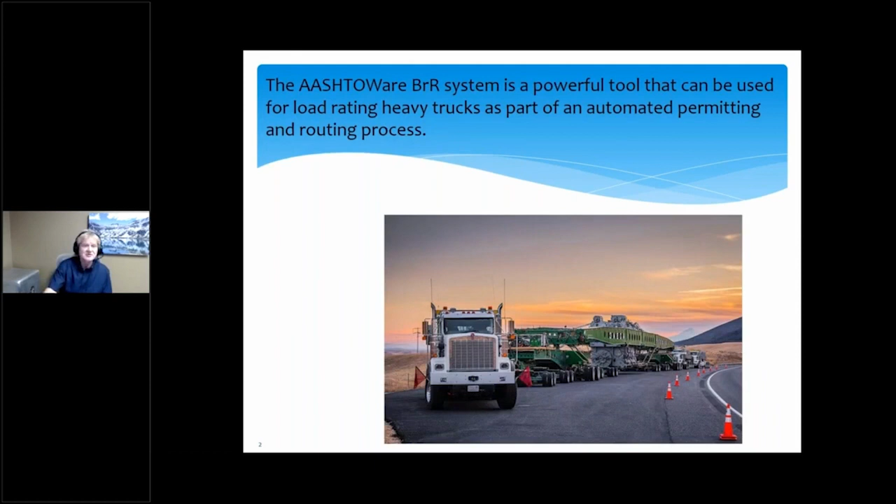The AASHTOWare BrR system is a powerful tool that can be used for load rating heavy trucks as part of an automated permitting and routing process.

The oversized overweight trucking industry expects state permit offices to be able to self-issue permits that weigh as much as 250,000 pounds. The higher the weight the state allows to be self-issued, the more friendly the color that the SC&RA has put on it, green being the best and red being the least favorite.

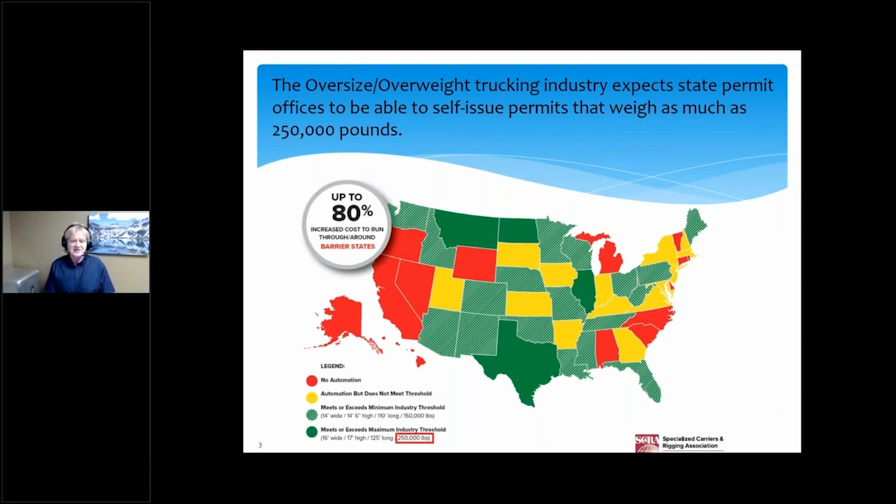I'm happy to say that 3 out of the 4 green states on this map use ProMiles routing systems.

Using the AASHTOWare BrR product, DOTs have provided safe, automated, oversized, overweight routing and permitting for these heavy loads up to 250,000 pounds. BrR is able to load rate vehicles that self-issue up to as high as 250,000 pounds, and is able to load rate 90% or more of the typical DOT's bridge inventory.

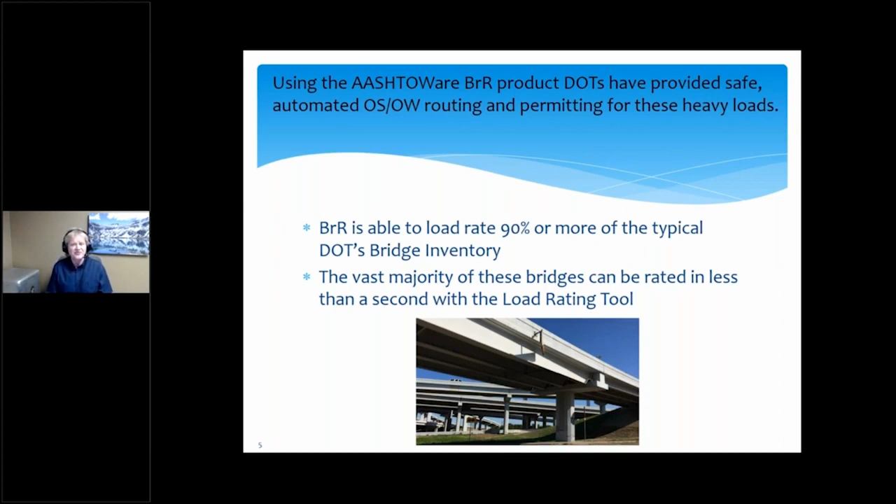The vast majority of these bridges can be rated in less than a second with the load rating tool. Keep in mind, this is full load rating, not any sort of approximation.

This presentation describes how to use the AASHTOWare BrR system with an automated oversized overweight permitting and routing system.

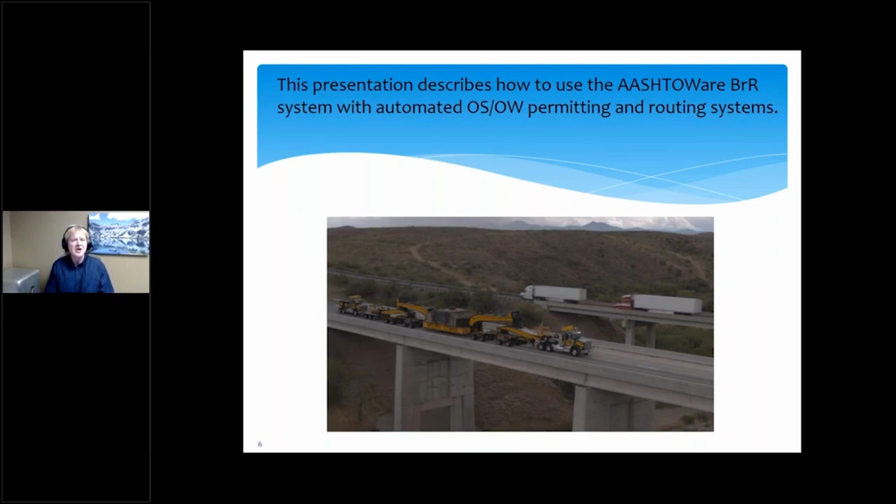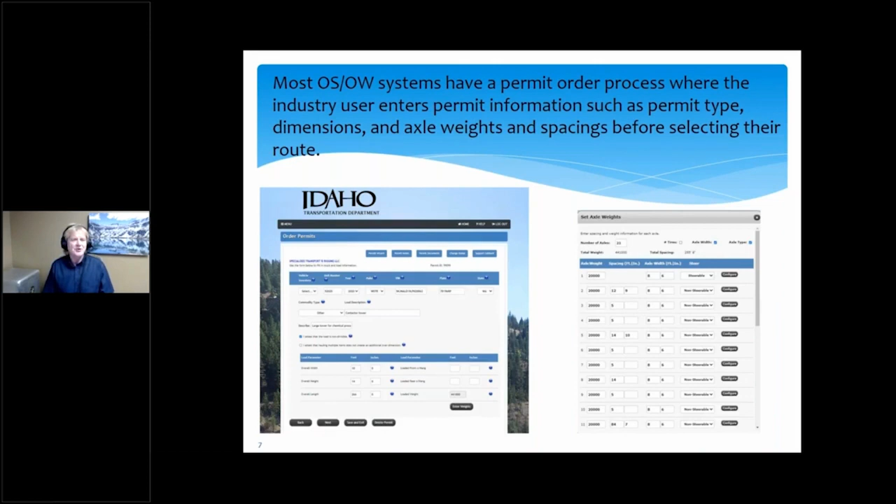Most of the oversized overweight permitting systems have a permit order process where the industry user enters permit information such as permit type, dimensions, axle weights, and spacings before selecting the route.

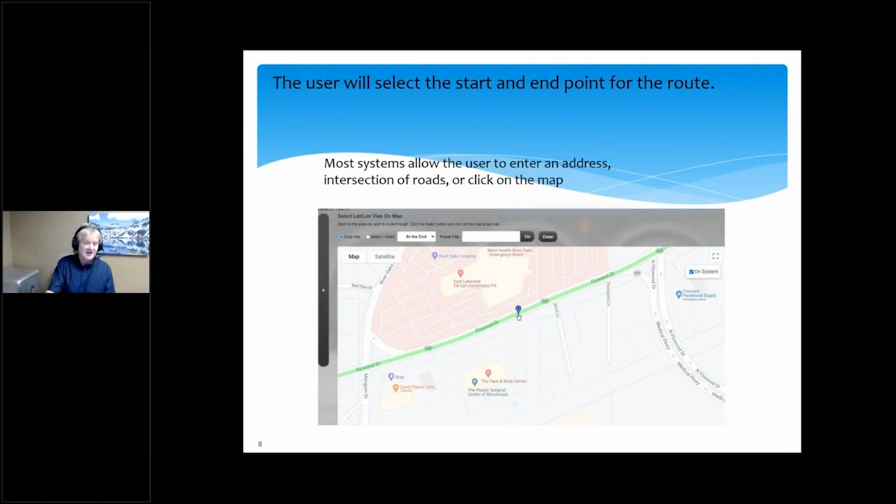The user will select the start and the end point for the route. Most systems allow the user to enter an address, intersection roads, or click on the map to identify the start and the end of the route.

The automated permitting and routing system will then calculate a route that is safe for the permit. The route calculation is performed while the user is waiting, so generally this needs to be done in a minute or less. It's this time constraint that drives how the load rating is performed in these systems.

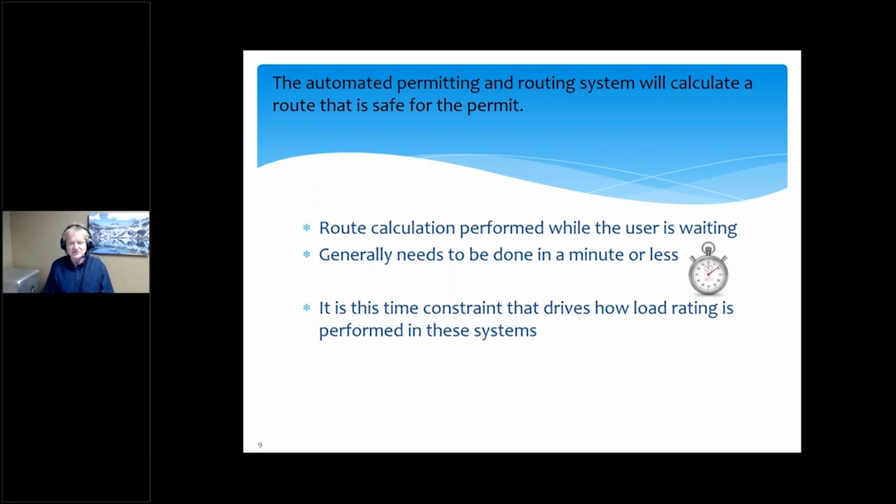Keep this time constraint of about a minute or so in mind, that's what you've got to present the user a route, or they'll consider your system unresponsive. Keep that in mind for the rest of the presentation.

The first step is to provide an overview on how oversized overweight routing happens. The first step of this is to build a routable GIS data set for all roads under the permit office authority.

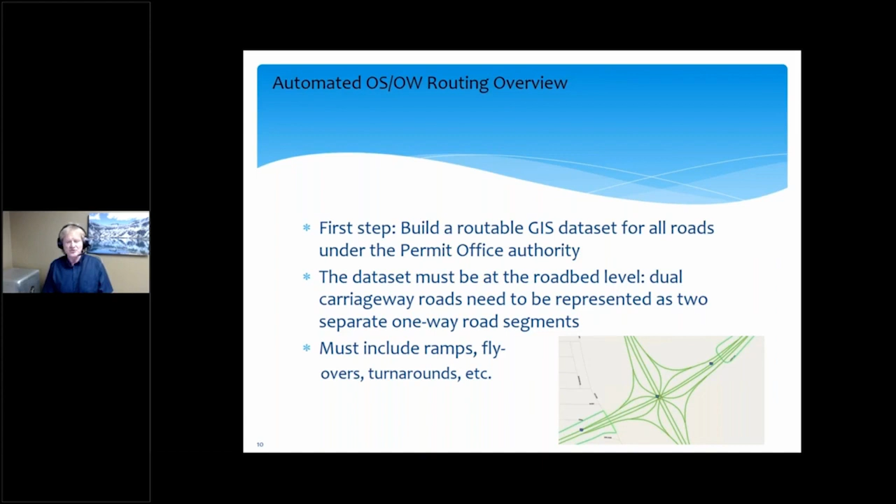This data set must, of course, be routable. That includes one-way directions, turn restrictions, signage, and so forth. The data set must be at the roadbed level, meaning dual carriageway roads need to be represented as 2 separate one-way road segments going in opposite directions. Your GIS data set must also include all ramps, flyovers, turnarounds, and so forth that connect the main roads together.

After you've built this GIS data set, it describes where permit vehicles can be permitted. We've got a screenshot here of the Denver area in Colorado, and you can see the green highlights on some of the various roads, and also on some roads that are not displayed at this zoom level. It's those green roads where the permit vehicle can travel and be permitted.

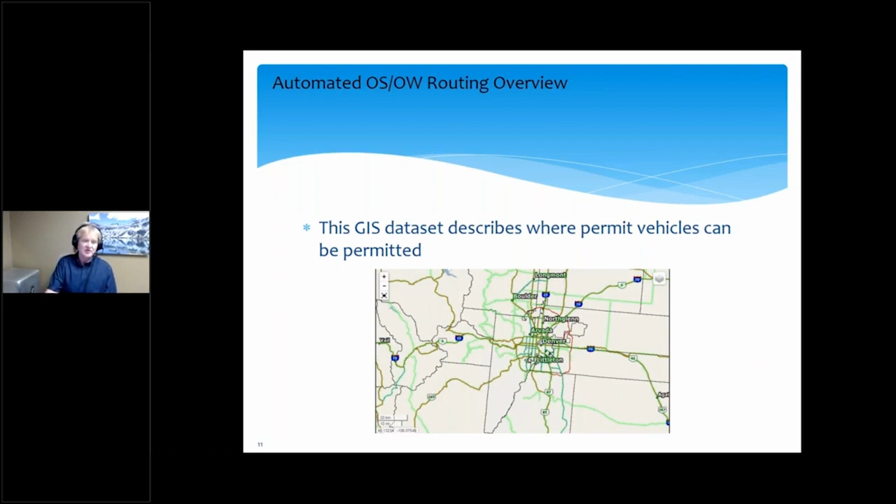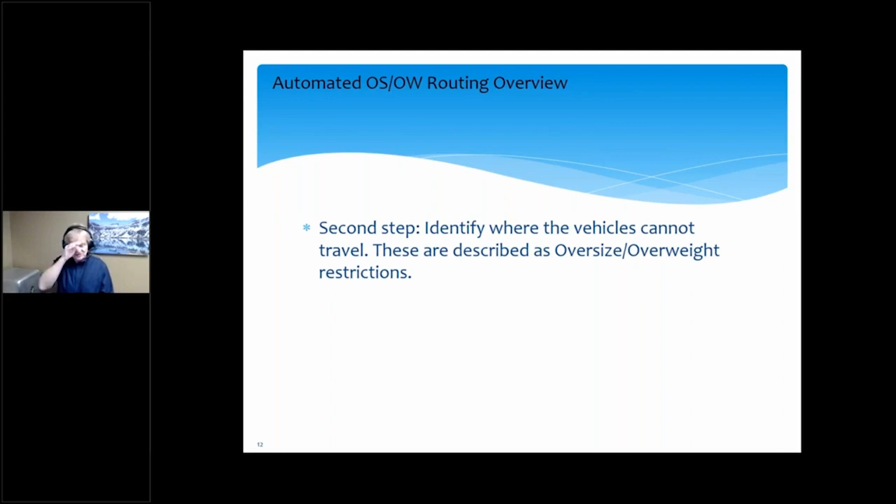The second step is to identify where a particular vehicle cannot travel. These are described as oversized overweight restrictions. It's these restrictions that will be applied to the roads that the permit office has jurisdiction on, and they're also specific to a particular permit, vehicle, and route.

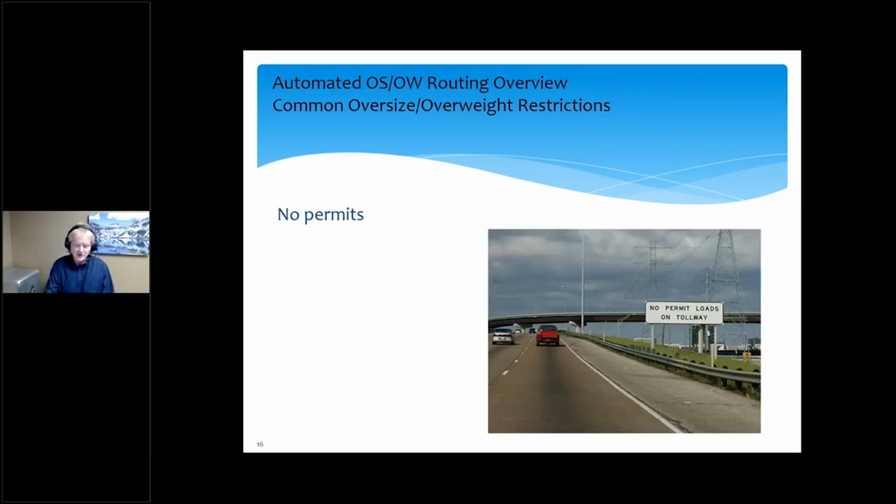The most common restrictions are vertical clearance, construction, no permits, turn restrictions, posted weight bridges and other posted weight restrictions, and finally bridges that fail load rating.

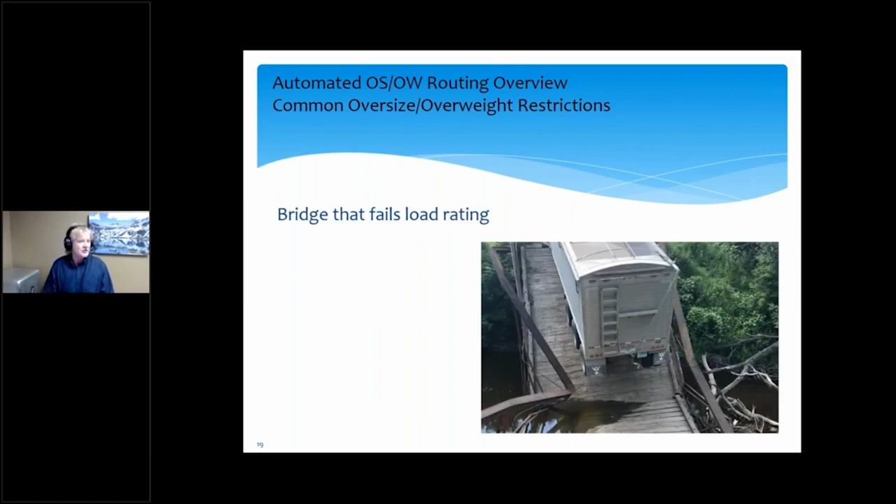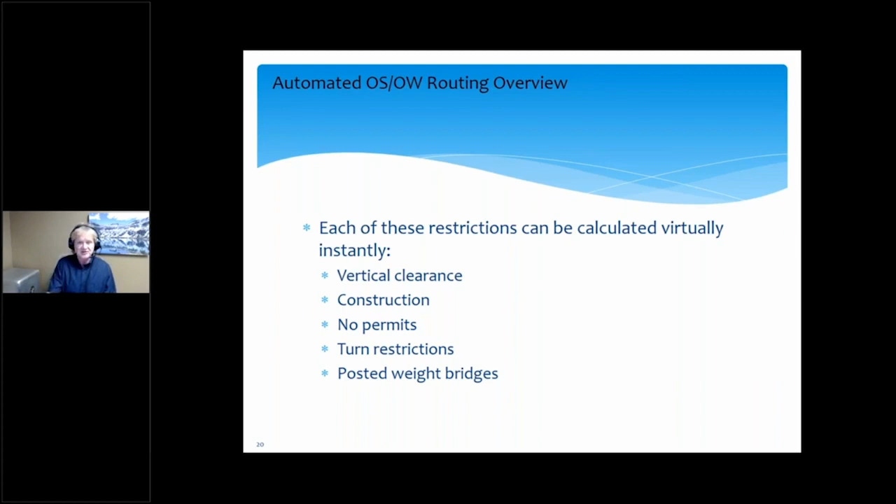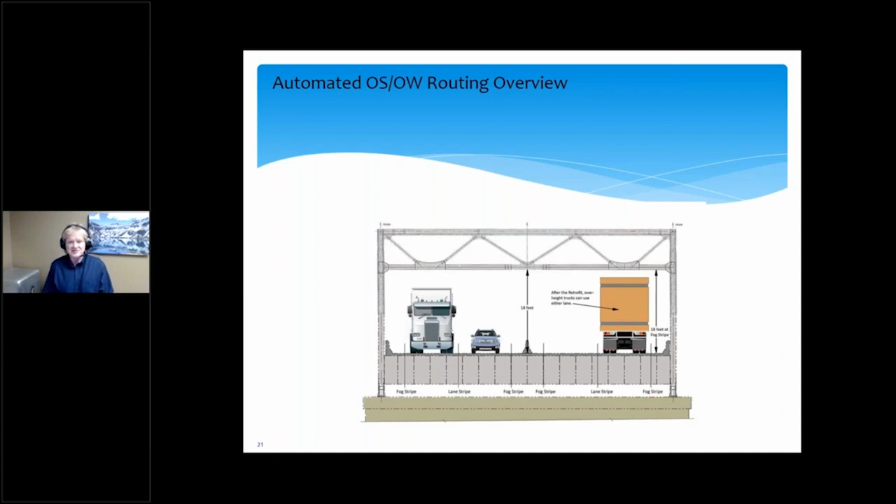Each of the restrictions on this list, basically all of them except load rating, can be calculated virtually instantly. That includes vertical clearance, construction, no permit, turn restrictions, and posted weight bridges. For example, to identify whether a truck fits underneath a bridge is fairly simple. You just compare the height of the truck versus the underclearance of the bridge. If the truck fits, you're good to go. If it doesn't, then that truck has to go around that bridge.

The routing system is generally able to identify all of the restrictions, except of course the live load rating applicable to a particular permit in the state, in less than a second. The way the permitting or routing systems work is it identifies all restrictions applicable for a particular permit in the state, and then it's able to route from the origin to the destination avoiding all of these restrictions. The optimal route can be calculated around any restriction applicable to that load in less than a second, usually in just a few hundred milliseconds.

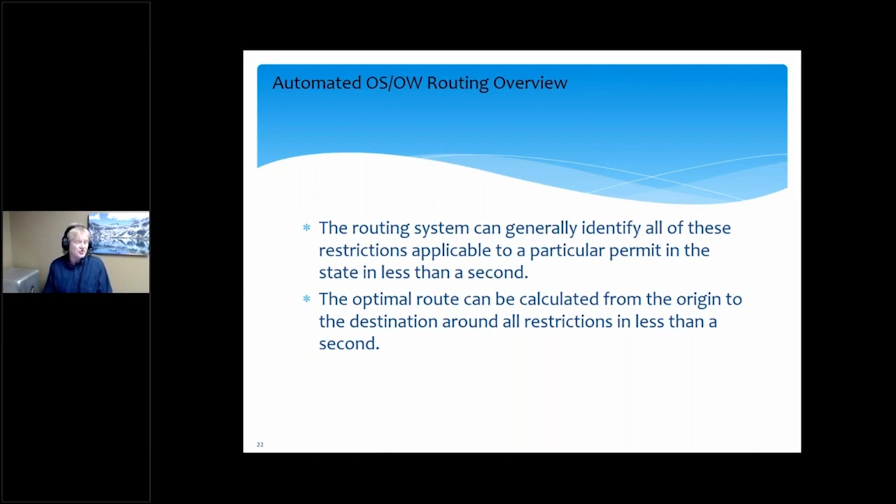Now the last restriction, load rating, is a little bit different. High quality load rating requires more computational analysis. It takes more time. The fastest high quality load rating currently is 40 to 50 bridges per second, and that's using relatively simple models with a single multi-core server.

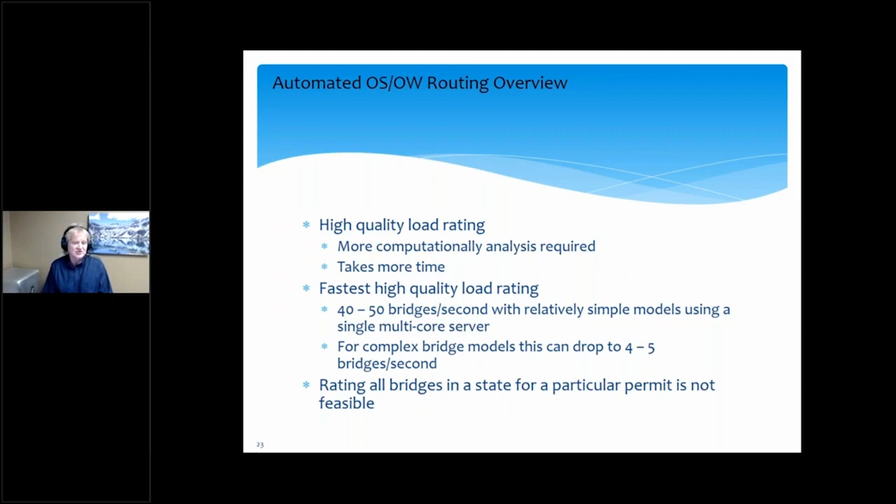With more complex bridge models, this can drop to as little as 4 to 5 bridges per second, again on that single multi-core server. Because of this, rating all the bridges in virtually all states for a particular permit is not feasible.

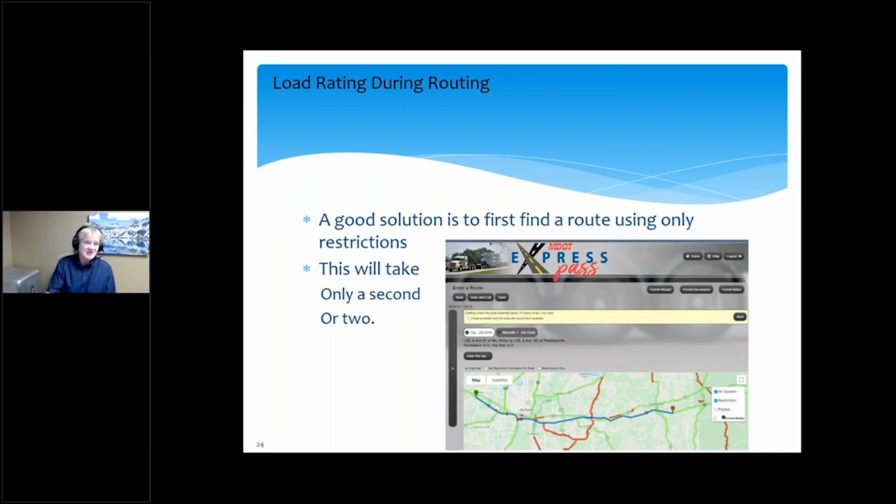The second step in this process is to identify the bridges along the route, shown by the little green check boxes. Those are bridges on this route. By doing this, we reduce the list of bridges that have to be load rated from thousands to a few hundred at most. At that point, we can rate all of these bridges using the load rating tool. Generally this will take from a few seconds to maybe as long as 15 seconds.

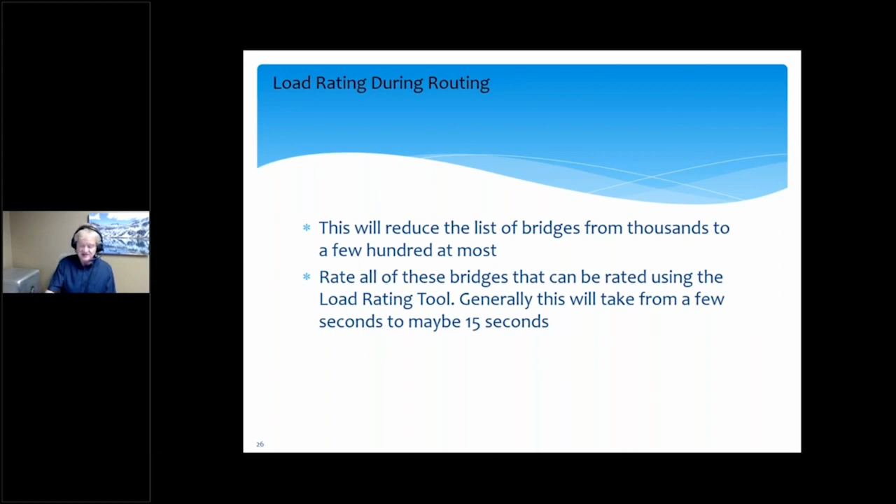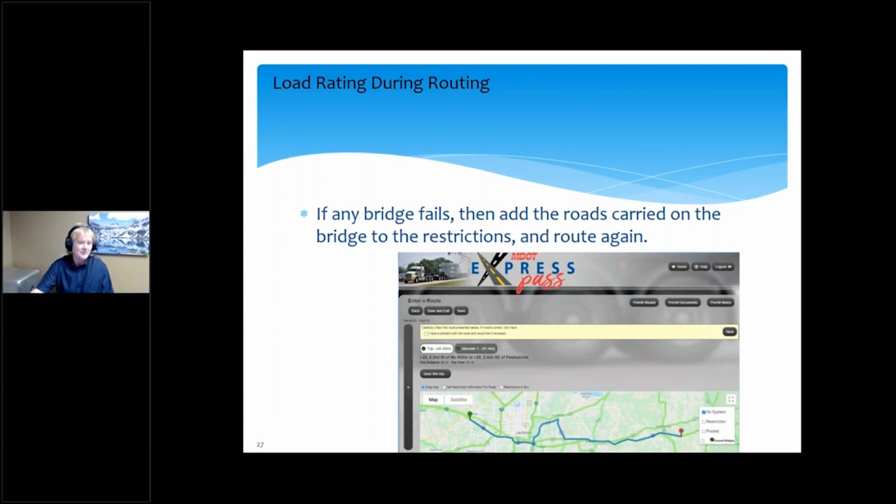If any of the bridges fail along the route, then the roads carried on that bridge are added to the restriction list and we route again. You can see in this case we've got a bridge failure along here, so we ended up routing up north to go around it. We repeat this process until the route is found or the system determines that no route can be found.

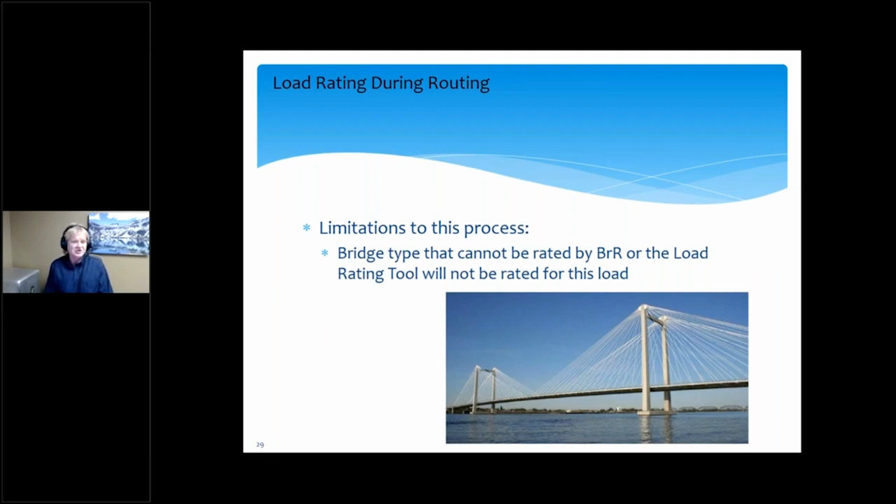The limitation to this process is, of course, the bridge types that cannot be rated by BrR or the load rating tool. Those will not be rated for this load. This was a lot of what Jake was talking about yesterday in his presentation from ITD.

The options for these omissions include, first of all, you can identify bridges that do not need to be reviewed until super heavy criteria is met. Every bridge office we have worked with has identified a subset of their bridges that they have confidence will be able to carry any load short of a super heavy.

You can also utilize alternative fast options, including simple moment comparison, axle weight limits, axle group limits, and table rules. ITD also uses a factor as an alternative fast moment. The last option is for states that are building out their bridge inventory but still want an automated oversize overweight permitting system that does some bridge analysis: they can prioritize bridges, implementing models for bridges with known lesser capacity first.

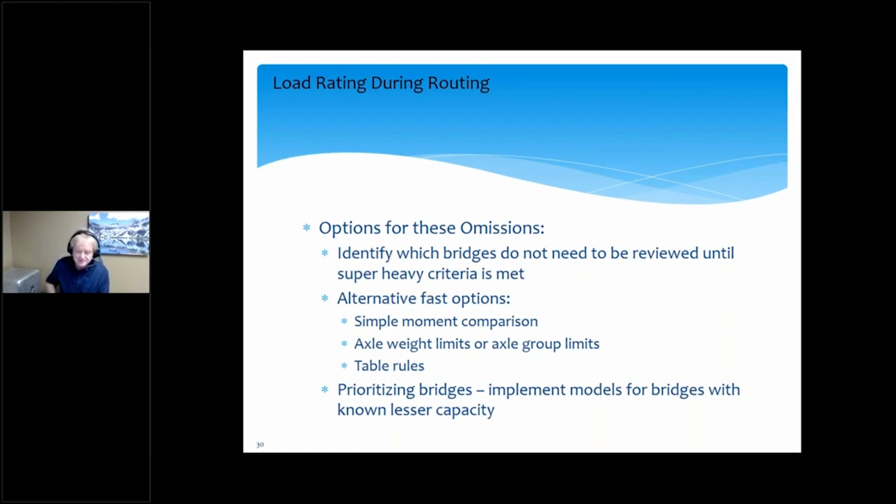Several states have successfully utilized the load rating tool to perform load rating on heavy, but less than super heavy, loads during the routing process.

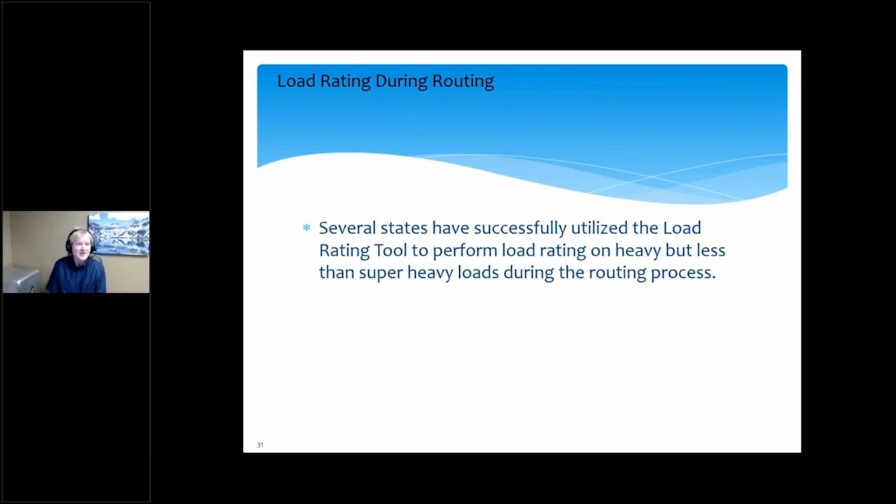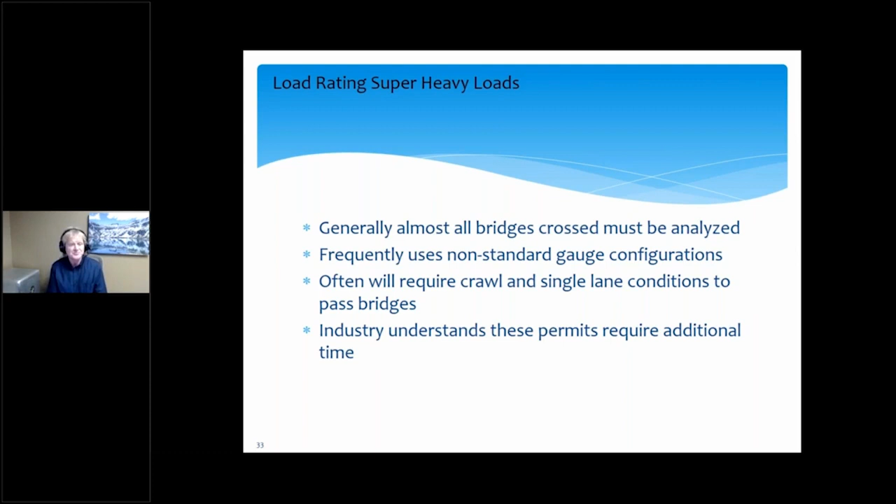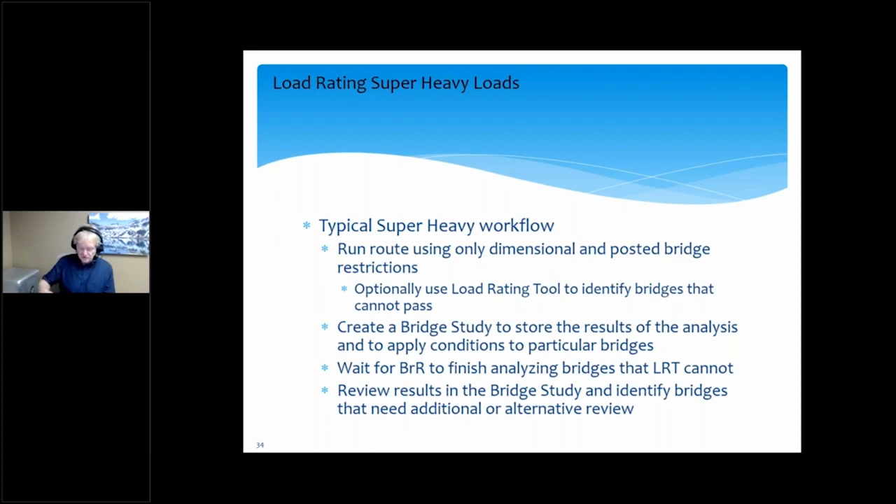So after you've created the bridge study, you wait for the full BrR to finish analyzing bridges that the load rating tool cannot. Then you review the results of the bridge study and identify any bridges that need additional or alternative reviews. Next, we're going to talk for a minute about load rating tool options when routing a super heavy permit.

Now, one thing to keep in mind is that for super heavies, sometimes bridges will be approved even though load rating tool or BrR technically fails the load. Engineering judgment or something else can be utilized to say yes, that load is safe to cross that bridge, based on whatever particular travel conditions it may add to it.

So what that means is that the system should allow the load rating tool analysis to be turned off for super heavies. The reason for that is the load rating tool may fail a bridge, but at the end of the day, that bridge needs to be along the route. And if you can't turn the LRT analysis off, getting that route often will be a bit of a challenge.

Now, if you can run the LRT for some of these bridges, the results of that can be stored in the bridge study. And as I said, the load rating tool is significantly faster than the full analysis, so that will save time.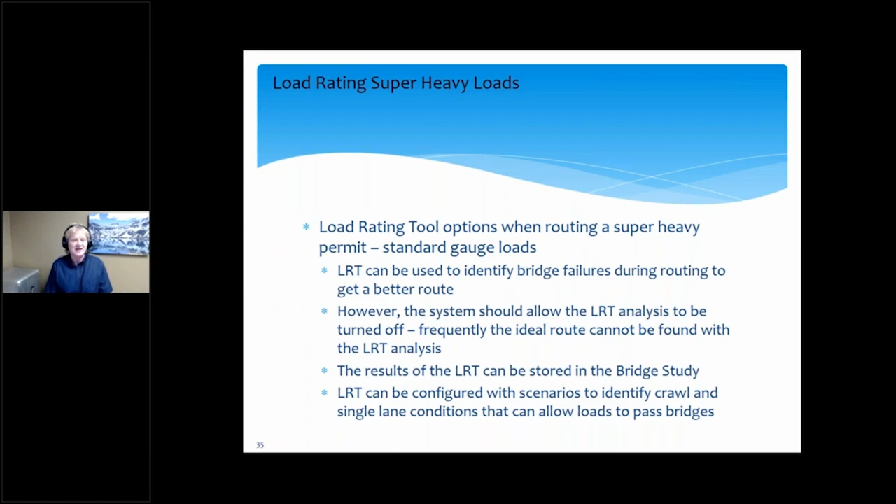Now, load rating tool also can be configured with scenarios, and ITD utilizes those, and Jake showed some examples yesterday. These scenarios can be used to identify crawl or single lane conditions that can be utilized to allow the load to pass the bridge.

Next slide talks a bit about load rating tool options when you have a non-standard gauge load. In most cases, currently load rating tool should not be used to identify the initial route. The reason for that is load rating tool cannot currently do non-standard gauge analysis. And frequently, if the carrier has a non-standard gauge truck, then in most cases, the non-standard gauge analysis will be required to pass the bridge.

Utilizing that special equipment is expensive, and generally the industry will not use it unless they have to in order to be able to cross bridges.

Now, one thing I do want to add on this is that if you use the axle weight reduction method for non-standard gauge, and that's what ITD uses. We've got several other customers, including Kansas and New York, that utilize that as well. If you utilize that method, then load rating tool can be used for non-standard gauge loads, because load rating tool does not realize that the analysis is actually used on a reduced weight.

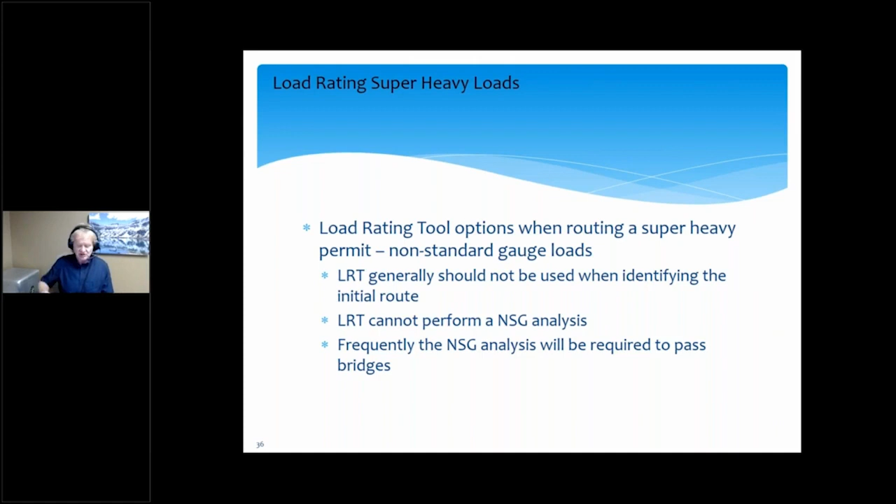So the full BrR analysis uses, like I said, a structure called the bridge study. Once the bridge study record is created, basically once all bridges along the route have been identified, the full BRR analysis can start. The full BRR analysis should be an automated process so that when the record's created, it will kick off.

If the vehicle is non-standard gauge and you've entered it using the non-standard gauge interface — and several of the states that ProMiles has implemented systems on, the industry actually enters in all the tire spacings and so forth — but if the vehicle is non-standard gauge and we're utilizing that, then full BrR analysis will need to be run on all bridges, and that will take a little bit of time.

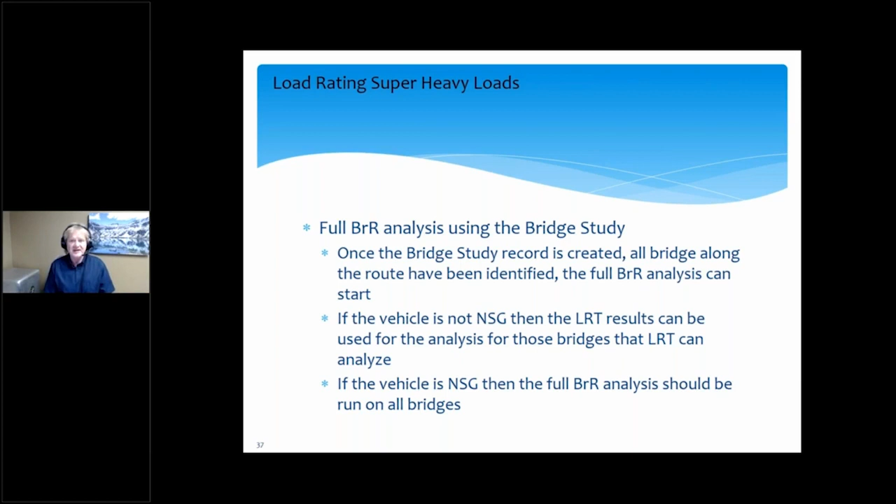Once the bridge study is complete, the bridge engineer reviews all results, identifies crawls and other conditions, and identifies bridges that cannot be analyzed with BrR, and we'll go off and do different sorts of analysis or other ways of identifying whether the bridge can pass. I do want to add that BrR version 7 and above can run all BrR bridge types using the automation. On 6.8.4 and before, there were a subset of bridges that had to be run manually. That's no longer the case.

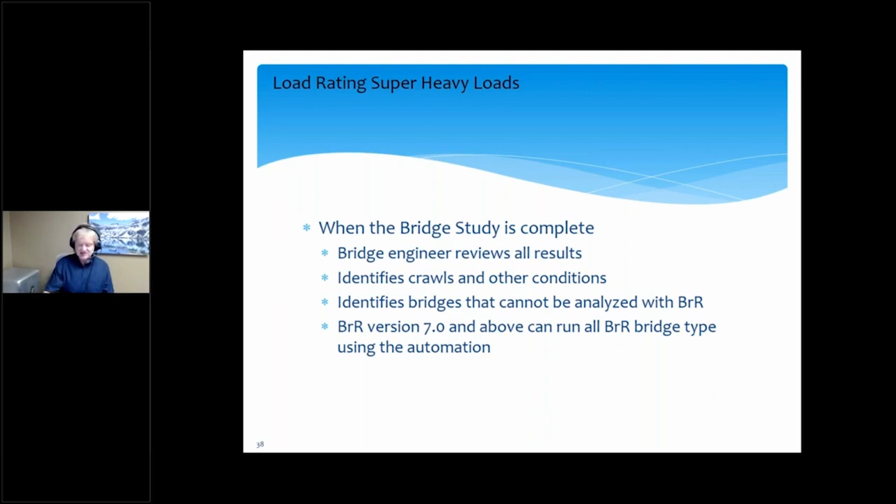Now, this is what the bridge study screen looks like for one of the states. I want to point out, this is for this particular load, a permitted weight of 453,000 pounds. These are the bridges that are a subset of the bridges along the route, and you can see that these bridges will have different travel conditions. For example, this is 5 miles per hour, only vehicle on the bridge. This one here is a pass, no restrictions, so that's at full speed. This one is also 20 miles per hour, only vehicle on the bridge.

Last thing I want to talk about: look at this particular bridge right here, we actually have 6 different scenarios that were set up. You can see on the screen the impact and the single lane setting for each of these scenarios. The first scenario uses full impact of 1, single lane set to no. The second scenario again uses full impact, but single lane was set to yes. Then for each of the other scenarios, we've got reduced impact at 0.2, 0.1, 0.05, and then 0.

Now you can see the ratings are listed along here for each of these scenarios. Keep in mind the system can continue running the scenarios in order until it identifies a passing condition. It can also be set up to run all scenarios, and that way the bridge office can use their judgment in order to have the least amount of restrictions on the travel for the permit as the bridge will allow.

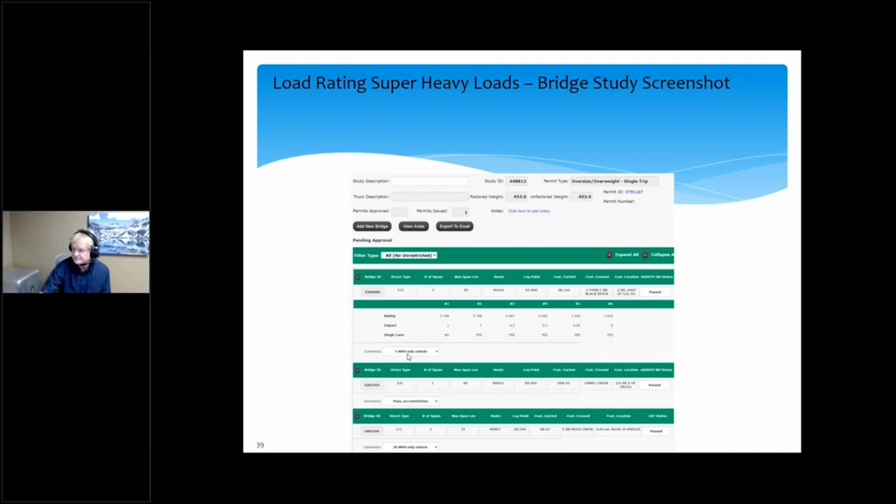Okay, now a summary here. Many states have been successful, or many permit offices have been successful routing heavy but not super heavy loads using the load rating tool as part of this process. Now, this is the steps. Generally, a route is created using dimensional restrictions but not load rating.

We identify the bridges along the route using load rating tools. If any bridge fails along the route, then we reroute around that bridge. We continue until a route is found. In most instances, for most of the permitting systems, these permits can be auto-issued. The important thing to keep in mind, of course, is bridges that cannot be rated using the load rating tool.

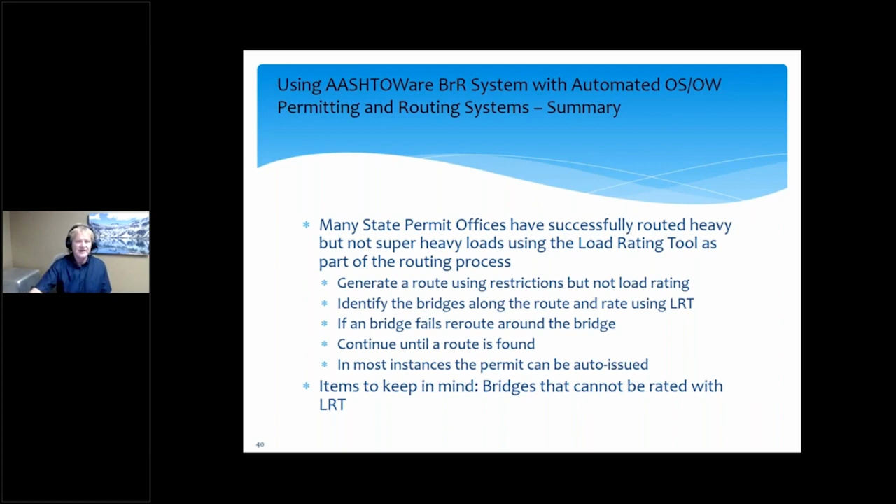Many state permit offices have also successfully routed super heavy loads using the full BrR analysis using a bridge study. Again, we generate a route using restrictions, and optionally we can use load rating tool or not. Full BrR analysis will analyze bridges that were not analyzed with the load rating tool. Full BrR will be used for non-standard gauges.

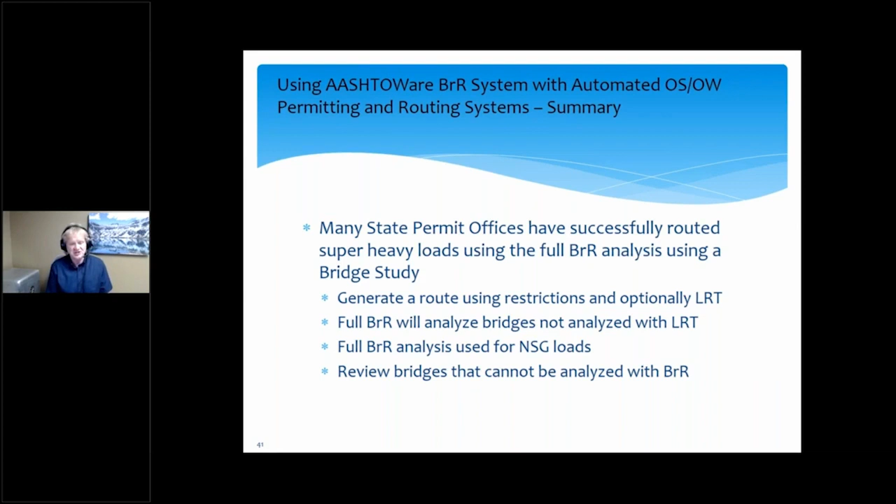At that point, the bridges are reviewed by the bridge office, and the results will be reviewed by the bridge office, including reviewing bridges that cannot be analyzed with BrR. And then either the permit is approved, a new route suggested, or the permit is denied.

Now, I want to talk briefly about some advancements with the modernized engine. These are really huge things that have been helping in the oversized overweight permitting analysis. First of all, BrR types that can be analyzed are now analyzed using the automation.

Also, one of the important things is that the full BrR analysis can better utilize servers with a large number of cores, that's 32 or more. This reduces the need for multiple servers in high demand environments.

And then finally, we no longer need to run any bridges on a standalone basis. In 6.8.4, there were some situations where we ended up having to run only one bridge at a time, that was the only bridge on a server. That is no longer the case.